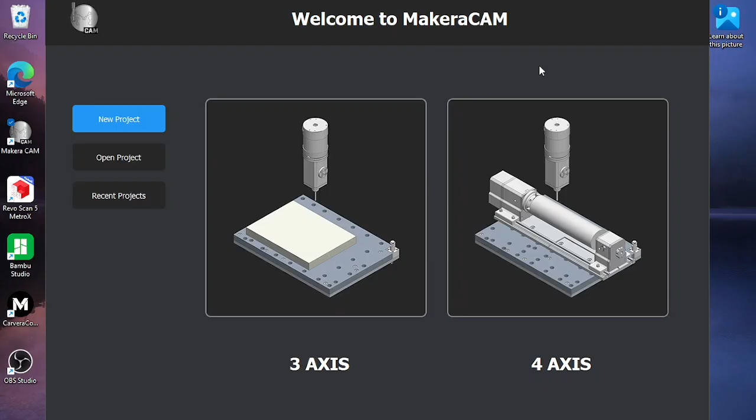Those are all going to be the same, and they'll be universal no matter what CNC machine you're using, especially if it's 3-axis. We're not going to talk about 4th axis right now. Most machines don't use that, and we don't need it for this project. So let's just stick with the basics of CAM that would be universal for any CNC machine.

Let's start with how to set up your stock. So this is what we would be carving out of. We're going to be using aluminum. Let's go into Edit. You would set your dimensions, and I'll do this for you. Let's just do 200 millimeters by 150 and 1/4 inch thick, so 6.35 millimeters. That's what we're using for most of this project.

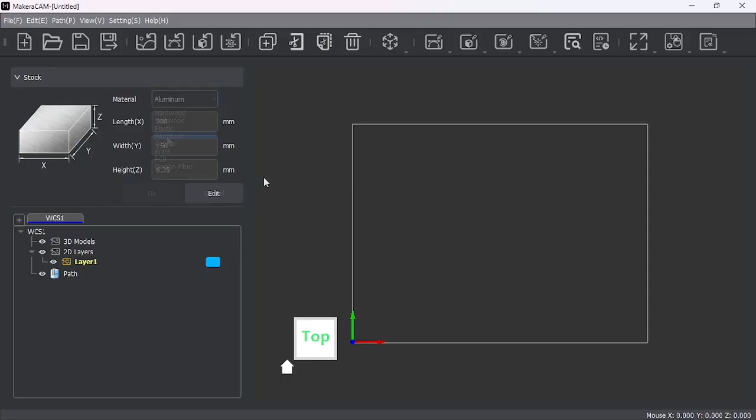And so that would set our stock. Notice up here it gives you the material. We're using aluminum on this, and that would set your stock. I'm going to go ahead and open a file that I've already used to build this project. Let's start off with something simple. So hit open. Don't save. So I saved a bunch from when I built this project.

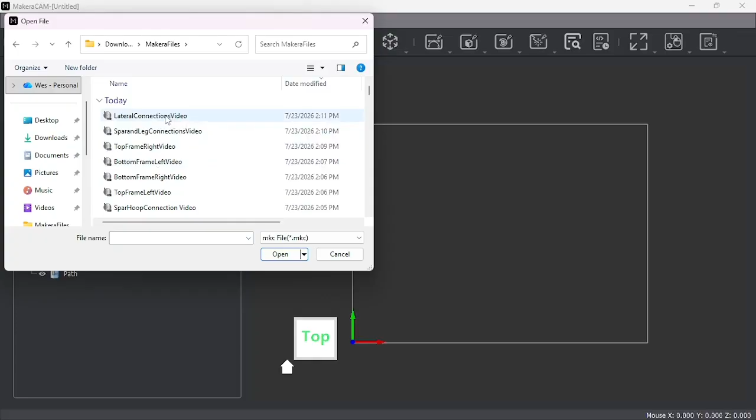Let's just start with these lateral connections, very basic. Hit open. And you're going to notice that the dimensions that I originally set for this are there. And I just barely was able to fit in that lateral support. This is a small tabletop CNC. So I would encourage you to get a larger one, because then you could directly export out of Onshape the parts without having to slice them up.

This one I didn't have to slice in half. It's its full length. But I did for the top frame, for the spars, for the legs. I had to quarter those up or cut them in half in order for those to fit on my CNC machine. It's a good skill to have in case that happens to you. Now you'll notice that the material thickness here is 3.17 millimeters.

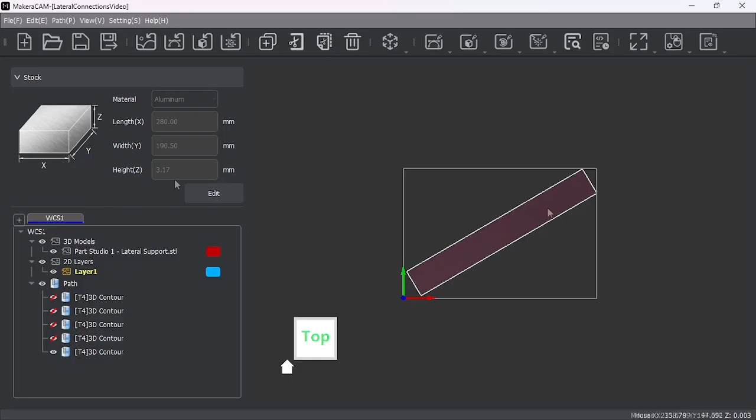Down here, you're going to see all the different tool paths and the contours that I use. This doesn't require relief because it doesn't really have any shapes on top of it that need to be cut out. It is the thickness of the material we have set here. We just need a contour. How to move stuff around: you would have gone File, and you would go Import 3D Model. You go to your downloads, and then you would find that file that you exported, and you would select it.

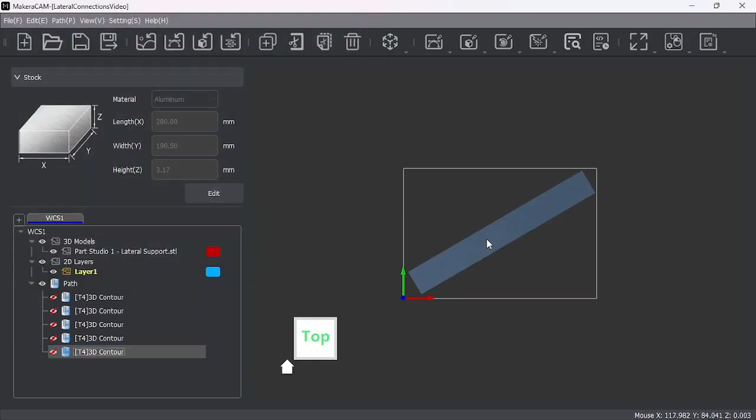Let's just pretend we did that and it came in, but let's say we needed to move it. So we would left click on that, then right click, go to transform, and then move. And then this screen's going to come up. Hold down on the mouse wheel, that pulls that away. You have isometric view here, so you can move around the navigation cube just like you did in Onshape.

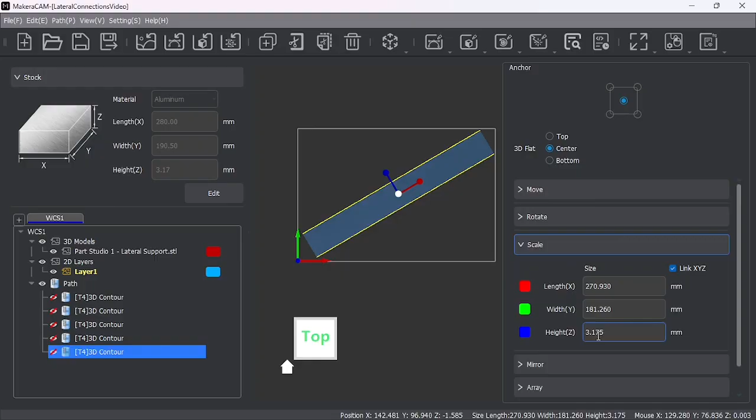And then you can right click on that to bring up anything that you want to do here to that part. So I'm going to left click on that, and you notice it gives you X, Y, and Z. You could scale it. So if you wanted to shrink it down, maybe it was past the border, it came in, it was too thick.

Let's say we came over here and that did not match the limits of your stock. You could scale it down here in the Z, but you would need to turn Link XYZ off and just do it there so that it didn't scale the other parameters, unless that's what you wanted.

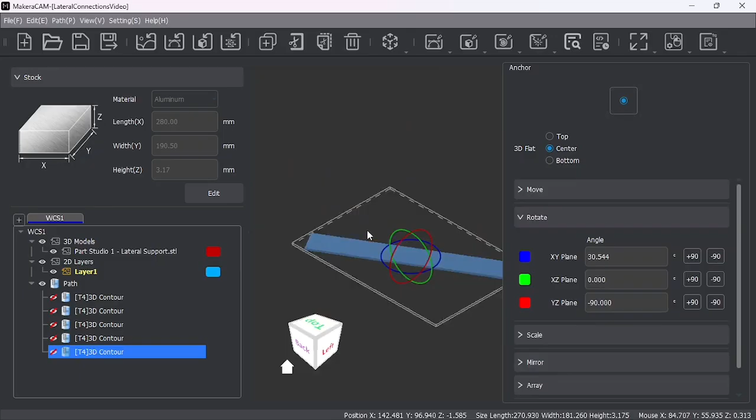You can come up here and you can rotate it. So you can do that manually in isometric view, or you can go up to top view or any of the views. You could manually do it here with the mouse wheel. I don't want to move it right now because it's where we want it. And you could rotate it in X, Y, and Z. And you can also mirror image it. Those are probably the most common tools that you see there.

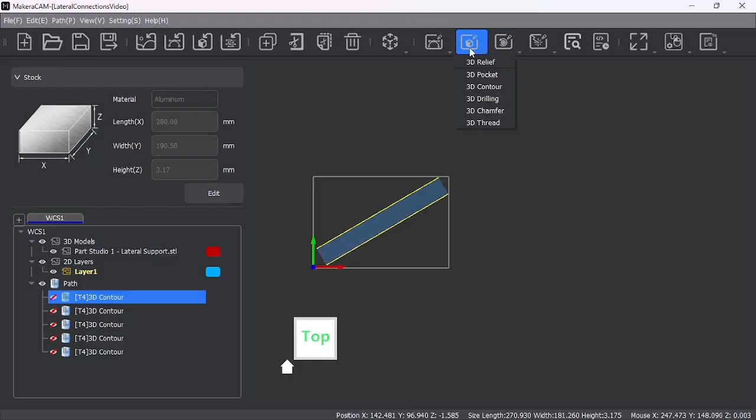We'll just do this one from the beginning. So left click, go up here to 3D path, left click on that, go down to contour. We're going to go to object, generate contour, and it makes an outline. That's what we want if we're just going to cut out the border. So left click on that line, you notice how it went to a dashed line.

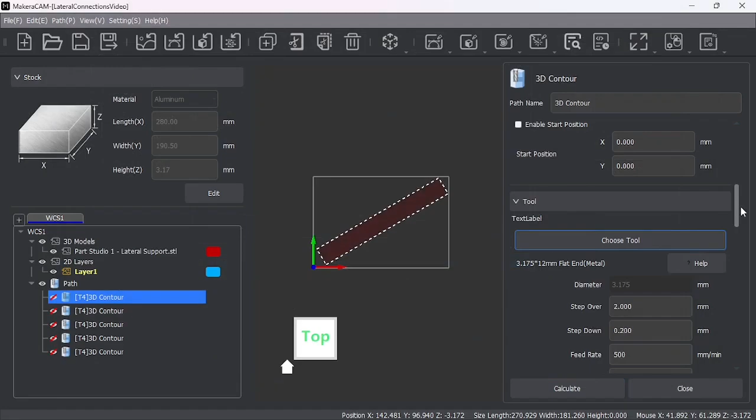If that was going to go too deep, our end depth is what we have set here. We could change that. We don't need to. Let's choose our tool. We're going to go to 3.175, 12 millimeters long, flat end for metal. So we're going to select that, and then we would select aluminum, which it automatically did for us. Sometimes it doesn't do that if you've been working on something different, and then choose. That's what I would normally use to cut something out.

We will choose pocket, but later on, not right now. And then we're going to do outside. So we want it to cut the outside boundary. This is your tool right here, that diameter, and it shows you that it's going to be on the outside edge of this. Any of this is just the direction. Does it go from outside in? Does it cut across, parallel? Those are stock settings.

Let's go ramping. So this is the plunge depth and the angle that it's going to plunge at into the material. How much distance do we have before it starts? And then when it pulls away, we're doing a 5-degree angle.

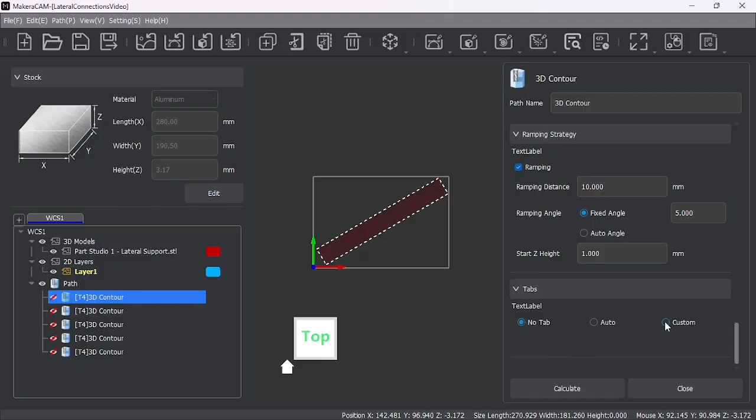And since we're cutting this out, we don't want it to fall out while we're cutting it out. We're going to do custom tabs. So I'm going to go down here and I'm going to do custom. I'm going to do add. I'm going to left click on that and I'll put enough tabs to prevent it from popping out. There we go. And then we could grind those off, but we can pop it out by hand. We hit calculate, and then it calculates that border.

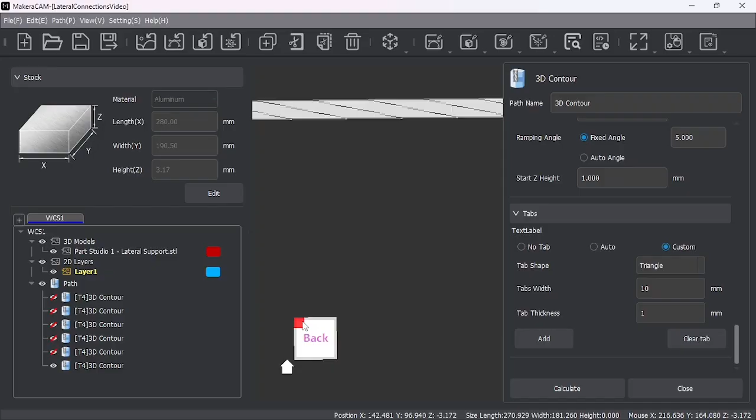And you'll notice if I go down here along the edge, it's going to cut all the way from the top of it down to the bottom, leaving those tabs to hold it in. You can use double-sided tape if you don't want to use tabs and stick it to the surface of your CNC machine. But I prefer just to use tabs. All right, so that's a contour. That's how I cut out the lateral connections.

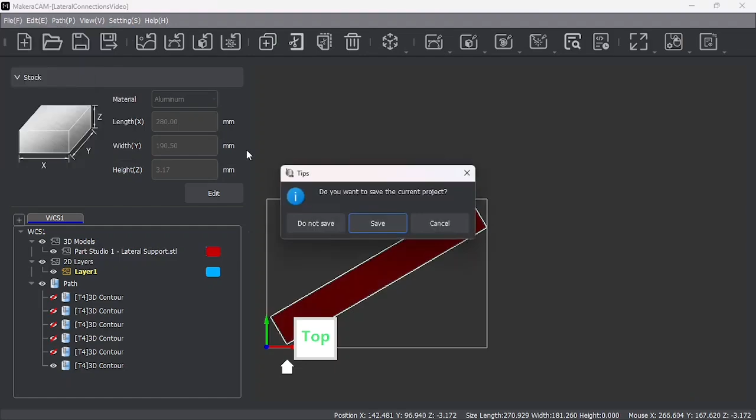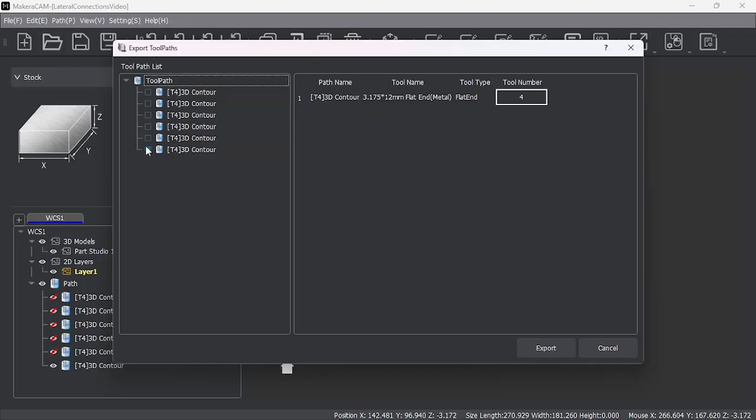Let's open up another one. Oh, while we're here, since we just did that contour, when you get ready to send it out to a machine, right click on that, go export. That's the one we just created. If you have multiple ones that you want to go with it, you can select them. You can turn those on. We don't want that because those were other parts we cut out. This is the part we just created, the contour. Hit export, and then you could name it. And I'm not going to name it because I've already done it.

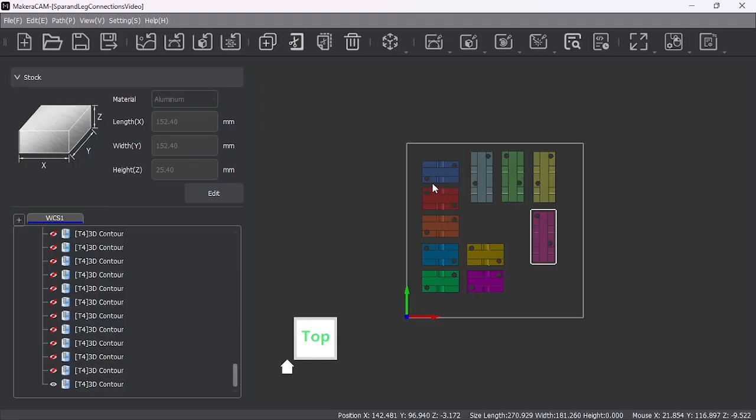Oh no, these are the spar and leg connections. So these will be a little bit more complicated. So you can see we have the leg connections here. We've got the bolts that go through it. That's the one we redid. And the reason I said it's more complicated is because we have to do it as a relief and we have to do it as a contour to get all of it cut out. I do a relief first, and I'll show you that in just a second.

These have to come in, though. Let me go back up here. You can't do contour cuts on an STL file. It has to be a STEP file. So when I exported it from Onshape, where you saw STL, I just changed it to STEP, and that allows us to do the parts that a relief won't cut out.

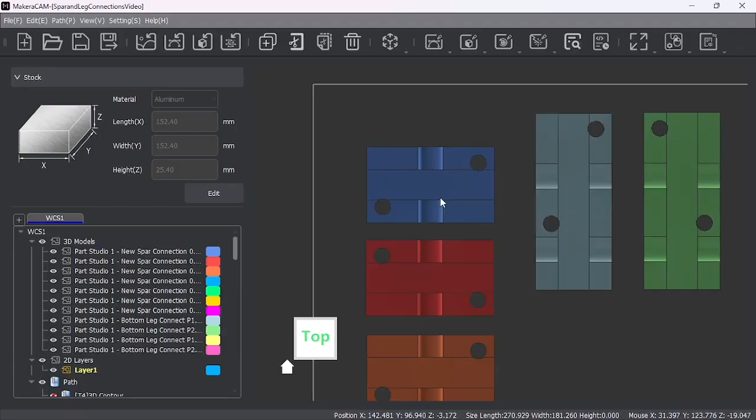All right, let's just start here with spar connection. Let's left click on that. Let's go up to relief. And so what this is going to do is it's going to cut this part out, but we want to have a max depth. And so since I'm not going to put tabs on here, I'm going to stop it halfway because we'll use a contour to cut it the rest of the way out. So that's why you see a difference in the Z height here.

So the full height of the stock material was 25.40. I stopped it early, so 25.200, so that we would still have material so it wouldn't fall out after the relief. I use this tool, just like I showed you how to select it before. I did step downs, so 0.200. So what that means is, how deep is that going to plunge with each pass? We don't want it to go too deep and break the bit, but this is what was recommended for aluminum.

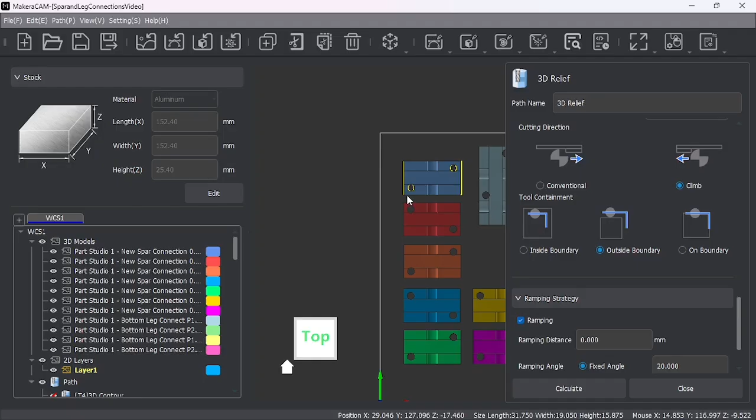We've got model boundary automatically selected. All of this was automatically selected. Again, we're doing outside boundary, so it'll go around the outside of it and cut it completely out, except for that material I told it to stop at. We did ramping. So the ramping distance, I normally will do 10. Right here, somehow it changed to 0. It should have been 10. And then we would calculate it.

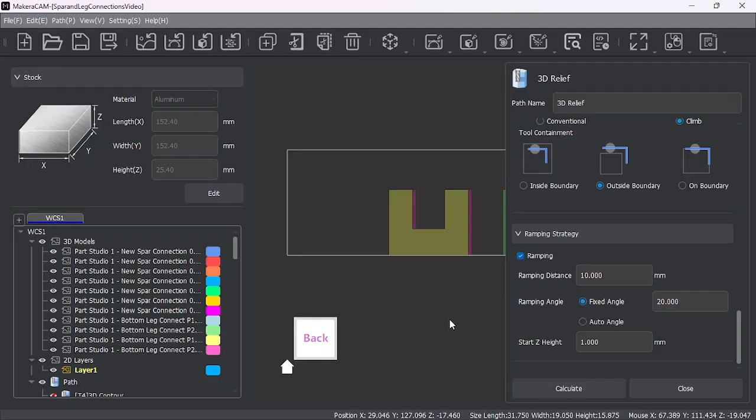And then I'm going to go over here to the side so that you can see what I was talking about where it would stop at. So right here, it's going to cut all the way down, but it's going to leave this material because I told it to stop early, because I wasn't able to put tabs in there with a relief. And so I don't want it cutting it completely out. At least on this machine, it won't let you. So there's our first relief. And that was the first step in cutting that out.

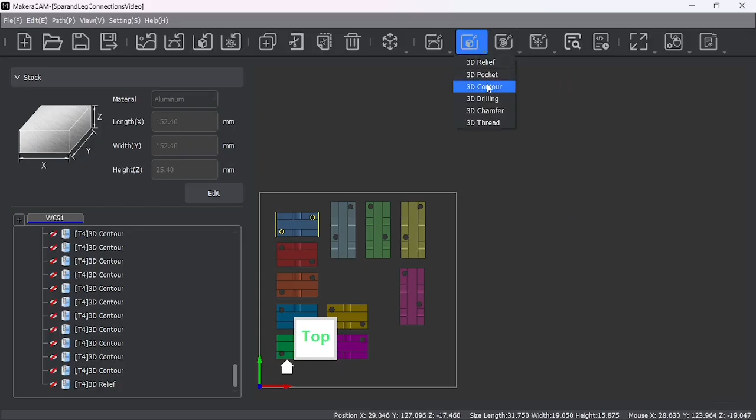Then I selected it again. I went contour, generate. Oops, I got to select it again. Generate. And now it's selected just that area. And this, for some reason, this machine has trouble in a relief cutting certain angles out. And it's probably the bit that I've chosen. It's not a ball end. It is a flat end. So we're going to select that.

And then we'll go down here. So if you ever see something that's not cut out by relief, you can come back in and use this method to cut these parts out. You see how I'm highlighting these? Like right now we have this highlighted. I'm just going to do one at a time. You can come back and highlight this one and it'll cut it out a little bit better. When you have a curvature like this, you'll want to use a ball end bit. So anyway, you select this. We see the dashed line.

We'll go down here and choose our tool. Select this tool. If you've got something that's curved, this is where that ball end would be really good. This will do everything we need. This 3.175, 12 millimeters long. So 3.175 is the diameter of the bit, pretty close to 1/8 of an inch. And then 12 millimeters is how long it is. Kind of like how you would read a bolt.

We've got aluminum selected. We choose it. There's our tool. We got our step downs at 0.20. We're going to do inside on this one because we need it to do the inside portion of this.

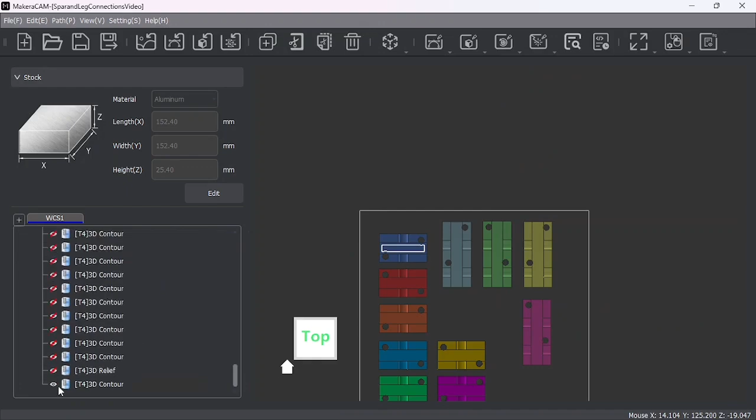I'm going to turn this one off. We're going to select this whole thing. We're going to come up and do a contour. We're going to do object, generate. We want to select these two holes we need to drill out. So I'm holding down the shift key. We see the dashed line. We come down. We're going to do a pocket so that it just drills those out. We're going to use the same tool.

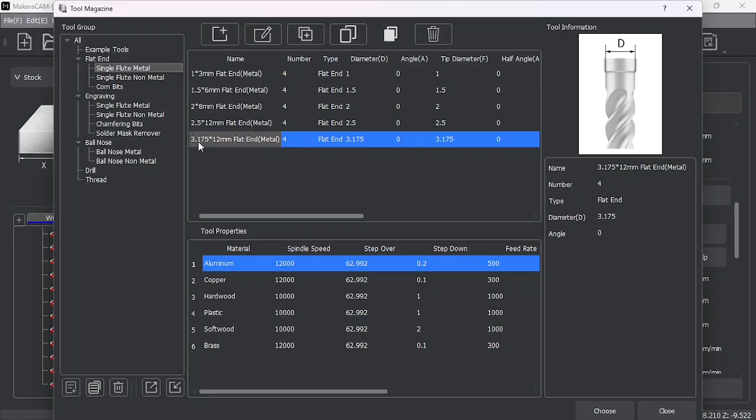Now here's the deal. That 3.175, luckily these are 4 millimeters, so it'll fit down in there. But if the hole that you're trying to drill is smaller than your tool bit, it's not going to let you do it. So make sure the bit is smaller than the diameter that you're trying to drill.

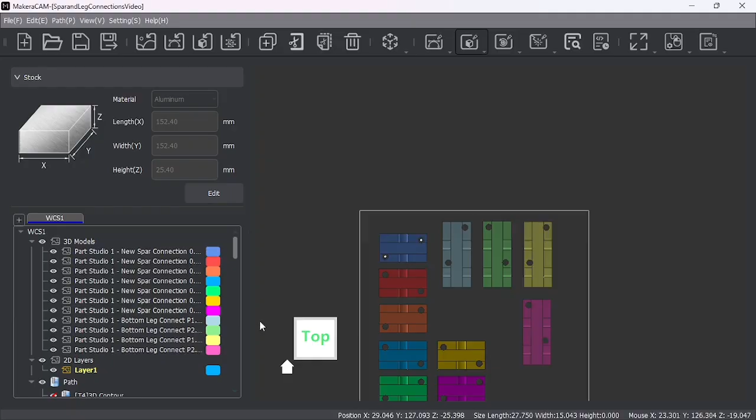So we're doing pocket, ramping, calculate. So we'll wait for that other one, and then you would export that. And you can export these all together too. You can just do these and then export them. So that's a pocket. And then the last one we would have done on this, I'm going to go down and turn this off. You don't have to keep turning these off. You can leave them on, but for me, it distracts me. I want to see exactly what's getting cut out. So I'm going to left click that again.

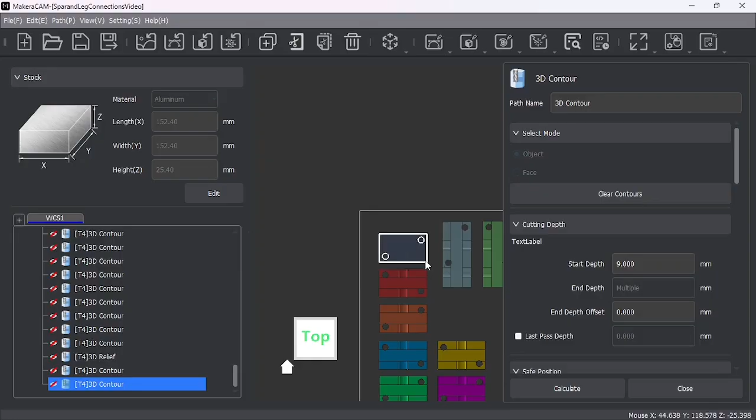I'm going to come up, I'm going to go contour, and this would have been the final cutout. So we go to object, generate, select the outer border this time. If I can select it. Sorry, there we go. You got the dashed line. We'll come down. We don't want it to stop. We want it to go the full length here of the material. Choose. We're going to use that same bit. We don't want the pocket this time. Instead of inside, we're going to do outside on this contour. And this is going to be the final cutout.

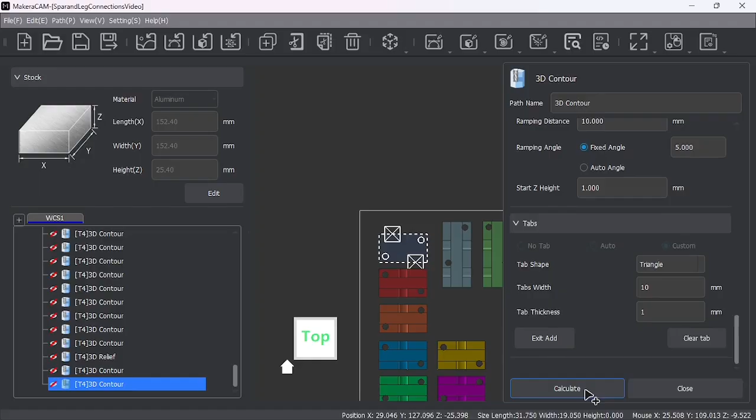We want the ramping. There's the same settings. We want to do custom, just like we did on that other part. We'll do add. I want to make sure I place these. I don't want to place that tab anywhere. It could mess up something. I'm just going to place these over here on the side. That's plenty to hold this small part in. And calculate. And there's our contour. And then that will take it all the way down and cut it out, and you see the tab right there.

Now the one thing that's different from that first part that I showed you when we did the tabs is the thickness of the material. So there's a lot it has to remove. And if you don't want your bit to go back through and waste all that time of it stepping down to get to that point, you notice here I set the start depth of that at 9 when I did this, so that it went all the way down, but it didn't have to go through all these motions where the relief had already cut it out. It started just above here, but I didn't want to accidentally plunge too deep in the material, so I stopped it a little bit early, and then it goes in and it does the cutout. And that'll save you time, so you can always change the start depth if you've already removed material.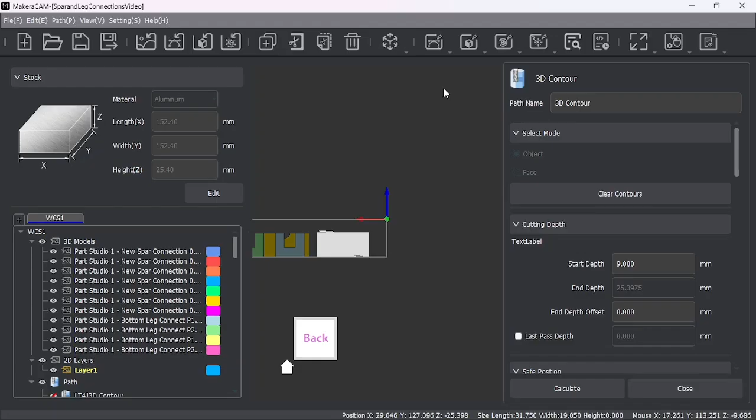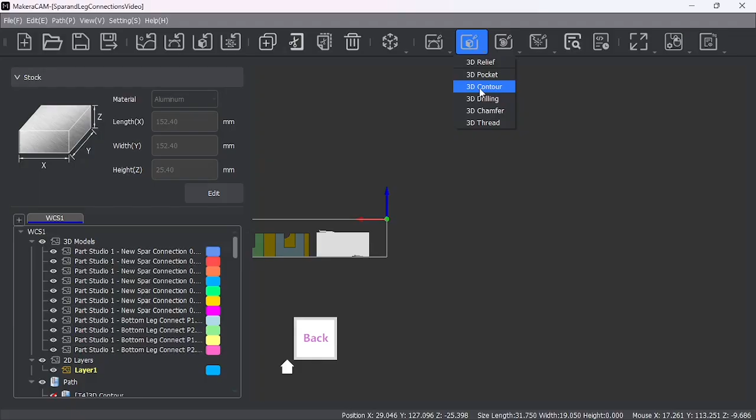All right, I've shown you pretty much every tool you're going to use for this activity. Relief to kind of cut it out and rough it out. Contour face, where you can cut individual faces that maybe didn't cut out very well on the relief. Contour object, where you can either do a pocket and drill or cut the object completely out by the border of it. So when you do your contour, you're going to want to do all of this inner stuff itself. So you would do a contour cutout of these, pockets of these drill holes, pockets of that, and then the inner portion of this.

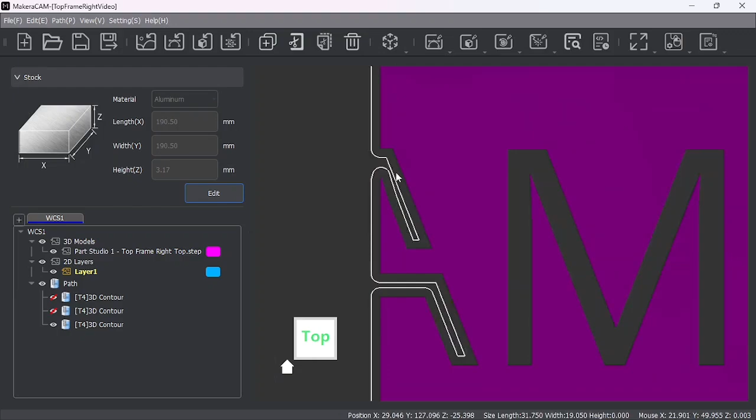But this is going to have to be part of your outer border when you cut these out. So you won't be able to do it at the same time you do these letters. But you can see how I had to split that frame up in quarters to get it to do. And now I did not have to do a relief on this. This is all contour. Same thing for that lateral support.

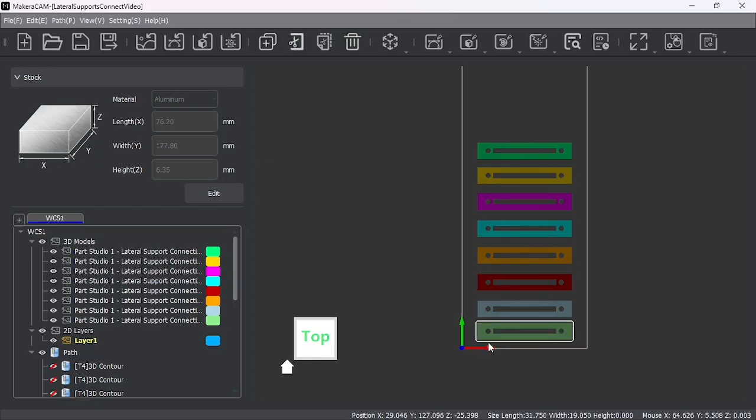It was all contour. Instead of 1/8 of an inch, you're going at 1/4 of an inch. But you don't need a relief on these. These are just contours. You contour the inside, pockets for the drill holes, and then contour the outside. That's how I had to cut up the spars. Now these were 1/8 of an inch.

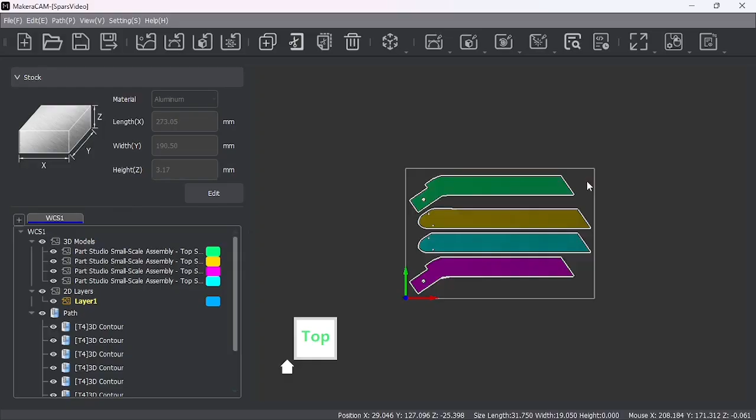And then I did some other ones that were cut at different areas so that when they were welded together, the cut wouldn't be in the same portion. But if you were going to cut these out of 1/4 of an inch, because I welded two 1/8 of an inch together to get 1/4 inch thick, because I found 1/8 of an inch was not thick enough. If you just cut this out of 1/4 inch material, you can just weld it here. 1/8 of an inch thick, pretty easy. Just contour pocket on the inside, contour with tabs on the outside to cut it out.

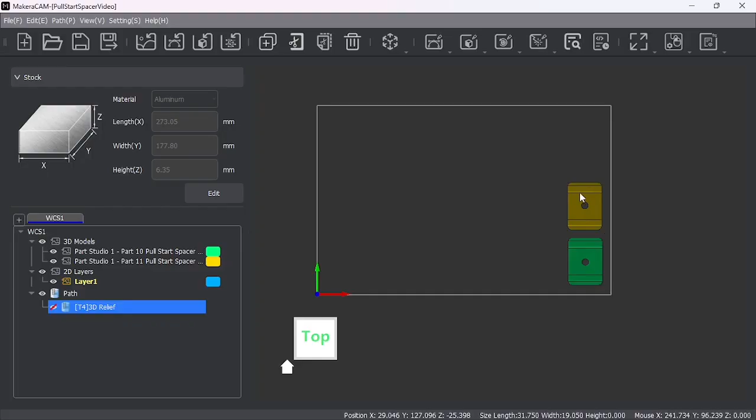So if you're just going to do a relief, you can get away with an STL. But if you're going to do a contour, especially if you need a contour face, it has to be a STEP. And that's how I placed them on the, and you can cut them out in one go. There's our swing arms. Let's do this one. So there's our contour. Let's go export. We've got it selected. Export here.

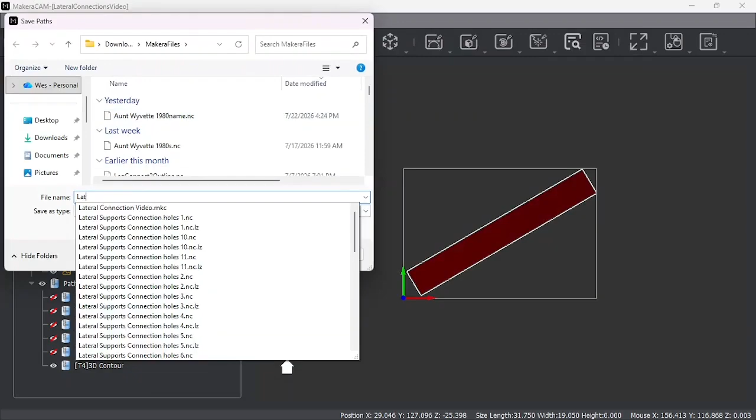Let's go lateral support video. So we know that's for the video. This is just a simple contour on the outside. I'm going to minimize this. And they've got a beta version of the software where these two are combined. So we go Wi-Fi. It's going to find Carvera. And this is what's going to be nice once they get the new software through beta, is you won't have to do this element. You won't have an extra piece of software.

You go down here to open the G code. You go upload, lateral support NC. So you're looking for that NC. You see the MKC, don't try to open those, because that is the actual file where we were doing the CNC, and it will mess this software up sometimes. Hit upload, it'll try to upload it. You want the NC, the G code. It's going to upload. There it is. So this is the border.

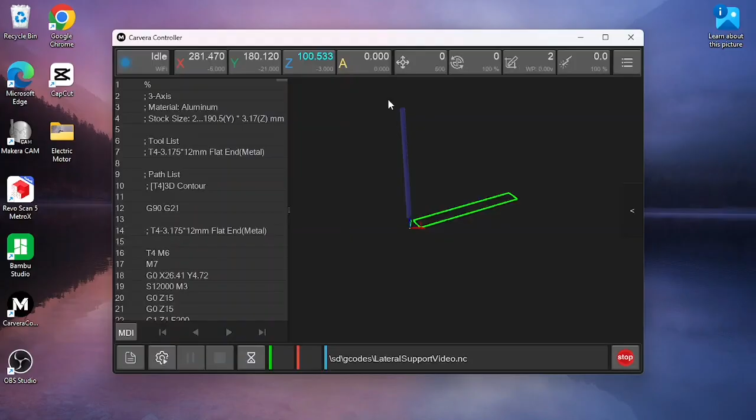Then you would go over here. You would config. I'm just going to do the X offset at 1, Y offset at 1. We would do scan margin. I'm going to turn off Z probe. And instead of doing all those points, I would set it here. I would hit OK. And then I would hit run. I'm not going to do anything right now because I have something in there. And it would ask me if the probe was in.

I'd hit OK. Then it would run that probe. It would check all these points that you see here. And then once it verifies that we've got the right stock in there with the laser probe, it comes back and asks if the appropriate tool is in there. You switch out the probe for the tool. You can either start it from the machine, or you can hit run again from right here, and it'll start running your CNC. So that's all there is to it, to CNC.

Not much more difficult than 3D printing, just a couple extra steps. One, that you have to go in and set your stock. You don't do that in 3D printing. And the other, you have contours, you have reliefs, you're removing material, so it becomes a little bit more complicated with the tool paths. But as long as your software is good, it's not that complicated. If you can do 3D printing, the next step for you would be CNC.